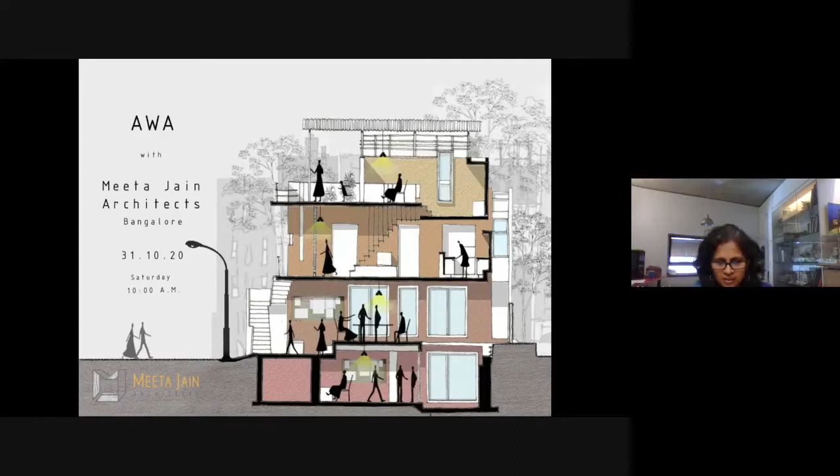Some of the driving questions for us in practice have been about how inclusive the spaces can be, more than the materialistic or stylistic aspects. At the heart of it is how can whatever we design or organize allow people to meet more than they are intended to, more than deliberately required. How can we increase chance encounters within the organization and also between the building and the outside world? The idea of architecture as a vessel of energy exchange between humans continues to fascinate us. This quote by Khalil Gibran, 'Let your home be a mast and not an anchor,' expresses the spirit of what this home aspires to be.

I feel a lot of deep gratitude to have had this opportunity to design a home which life presented to me, almost like a dream space, where one's spirit has not felt anchored or held, but it's been an amazing space of exploration, open to family, friends, extended family, guests, and where I've met the most amazing people. So in that sense, it's really worked as a mast.

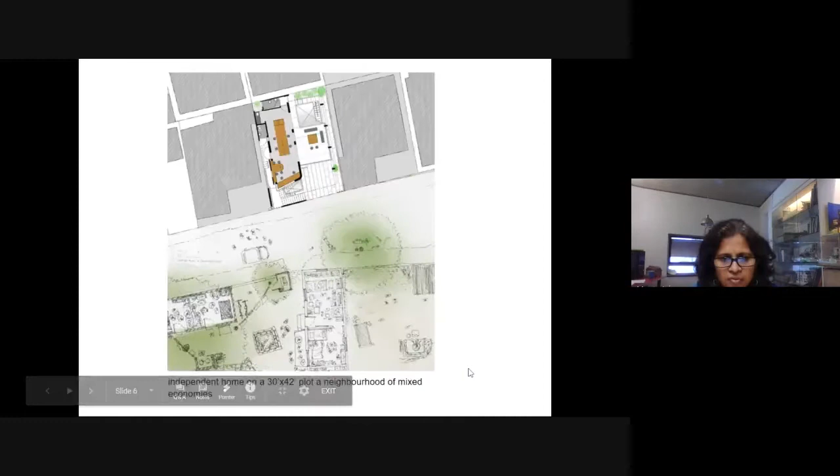The facade is modulating in nature, like the front facade by the use of louvers. And then, of course, the finished versus unfinished in terms of interior surfaces is also at play.

Now, coming to the neighborhood, right opposite the site there is a little community of vendors, which is actually a disputed property, so the owner has let it out to a vendor community. I really call it a neighborhood of mixed economies - a middle class or low middle class presence, which actually makes it a very interesting site in many ways in the urban context.

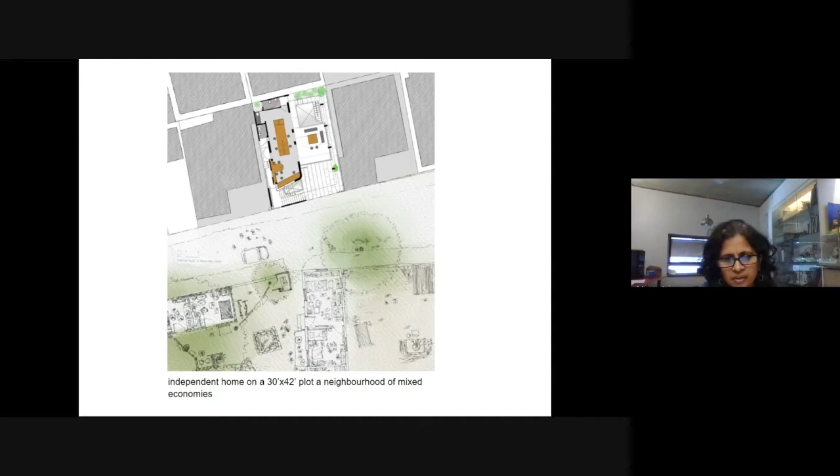These beautiful drawings were done by two interns, Kamal and Vikas from CEPT, who were here last year. As the picture shows, there is also this aspiration to engage with the children of the neighborhood, whose gate is right opposite ours, over some events. So this is a little Ganesha which was made with these children.

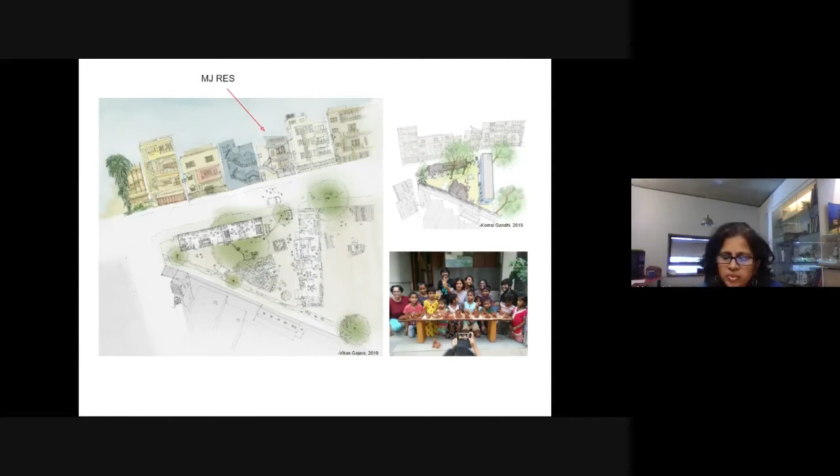The gates were open, so we used the front yard, and a lot of these children are Muslim children, and it was just interesting to see how there are absolutely no boundaries when interacting with children. So you will also see me constantly talking about the use and imagination of spaces along with architecture, because that forms an integral part of our work.

The other thing that consciously dominated the crafting of this building was how ungated and open the facade could feel in a neighborhood which is gated. As you can see, the buildings on the left and right with their obsession with grills and more grills, and security concerns dominate.

Whereas in this building, we chose actually not to have any grill in the front, because my view is that the thief never comes from the front. But at the upper levels, we do have grills where there are possible places to hide.

So essentially, at the form level, it's a pavilion and a box, a duality. And the same duality is expressed across all levels, as you can see. There's a basement, which is the largest space, where you can see these two columns.

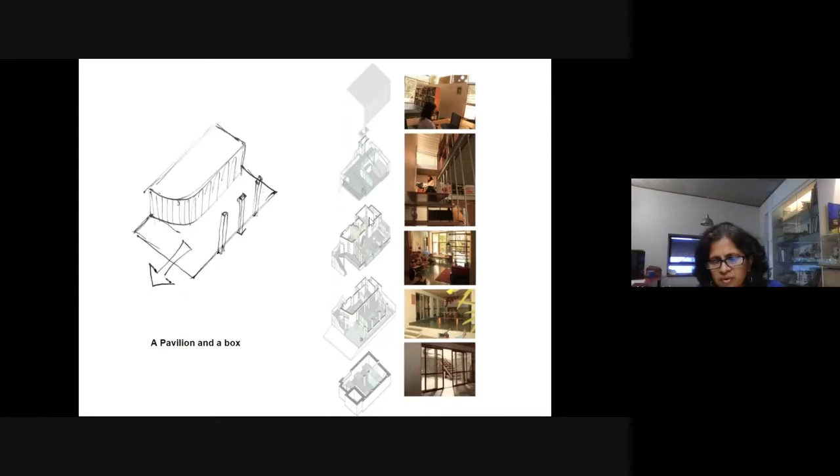Then at the ground level plane, it is completely open, and the box is towards the left side. The same thing continues at the first floor level, and at the second floor level it reverses. The pavilion stands out in the terrace, so the box becomes a void there.

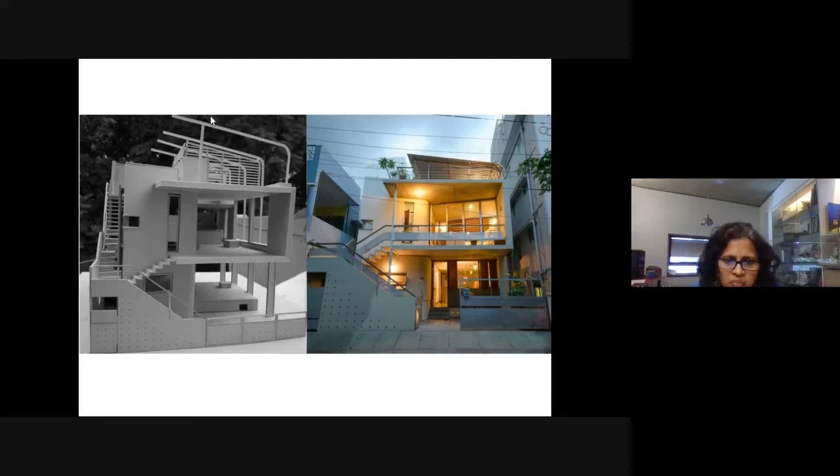And as the model shows, the sheet roof, which is actually the secondary layer of the pavilion, comes from the top, takes a bend, and rises and falls in the living room space. This has been removed to show the pavilion-like nature of the model, and then just the columns continue down.

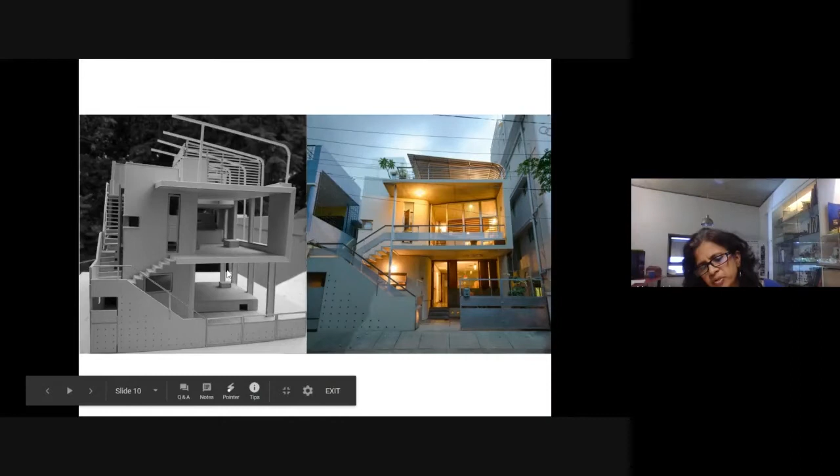This left side picture shows how the building was originally present. At the ground floor level, there was an open volume right from the beginning to the end of the site. Later on, this open space got built and it's present day the office where we work out from.

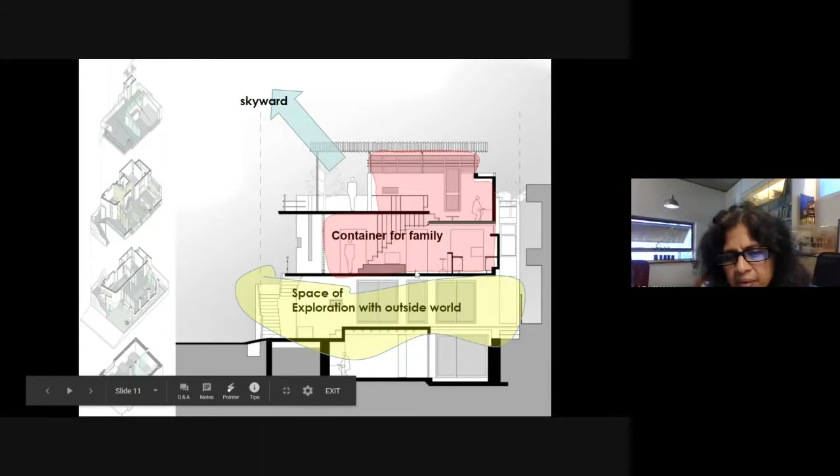This section explains the same thing. The bottom two floors are for exploration, and the upper floors are a container for the family, and there is a dominant skyward connect. Having said that, I think the great shuffling of spaces happens because I have the privilege of working - privilege and also a constraint of working.

I've been a single parent, managing family, and just multitasking. Earlier, my parents were here, both of them were here, and they passed on. So this really allows me to attend to everything very efficiently.

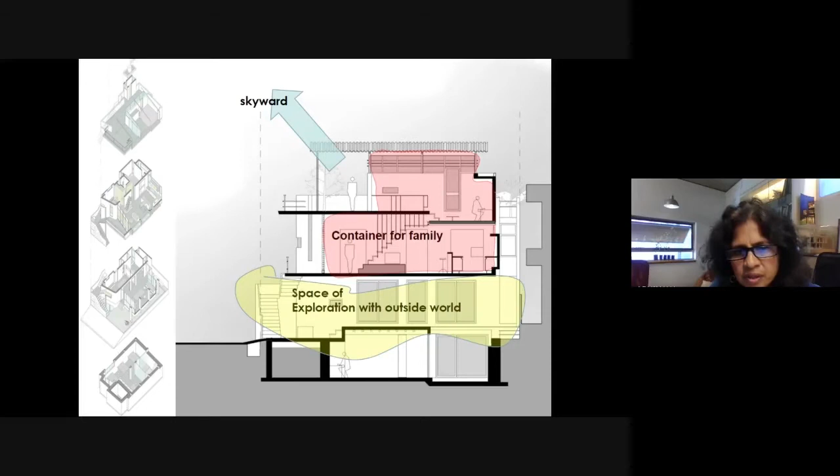So these are the plans, and I want to highlight one thing to you. As you can see, it's a very simple plan, perhaps the simplest of all my projects. This ground floor is completely open, and only the box—the box is also kind of softened with the...

The site was not a perfect rectangle, and that oblique shape allowed for the staircase to fit in, and also gave rise to this angular wall, which at the upper level invites the user in. I also want to point out that the setbacks have been used cleverly, in the sense of extensions with metals.

The top left corner was allowed by the bylaws to get occupied, so we've put in toilets, staircases, and these little balconies there. Even the living room projects out into the setback space, which allows for using a temporary material. So I said, since I'm using a temporary material, a little bit of fudging with the bylaws is okay.

As you see, the house totally orients to the east—there is no view to the side at all. At the back, there are some openings through the kitchen. So the living and kitchen bay is one space, and then there are two rooms here with a toilet in between. The third room is accessed through the staircase, and then there's a whole terrace to be used.

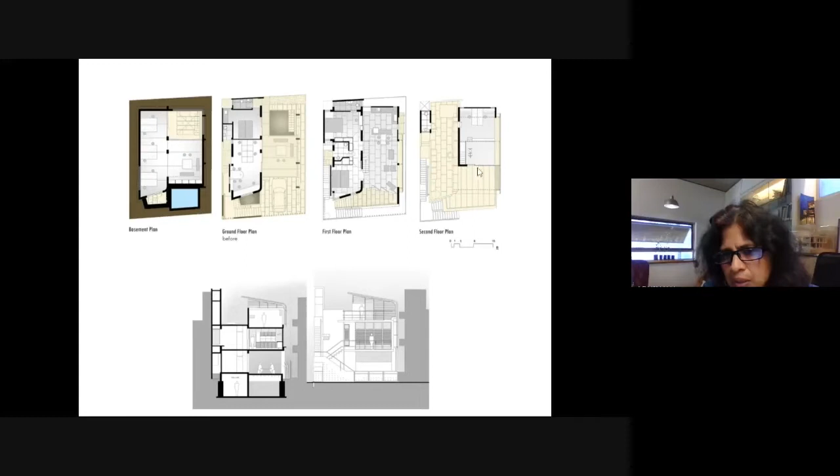So I began by putting the office here, which wasn't the original plan, so that I could just live between the first floor and second floor and not need to go down and spread myself out. So the initial office was on the upper floor.

As you can see, this picture actually shows when the office had moved down, but further I'll show you how it was earlier.

The compound wall becomes a very important element in most of our designs, where just by raising the wall and including the landing, a lot of—like below this wall, there's UPS and a lot of service areas at the same time. So it's about how one can use each and every element effectively and tuck in things without wasting space.

And so, opaque and openness again—also finding to what degree one can engage with the kids opposite, because once the gates are open, they just want to run in, and you want to engage, but at the same time, how do you draw balance? So sometimes we do engage them with these kinds of activities.

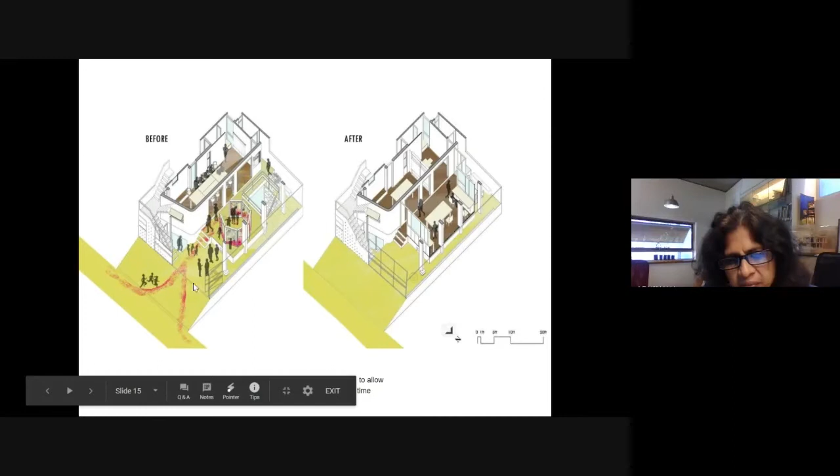I want to show you how the space changed. Earlier, the street came in, and we had used these spaces for exhibitions and many different activities. And then from there, you could go down and access the basement through a courtyard. Subsequently, the space got enclosed and became the present office where we are sitting right now.

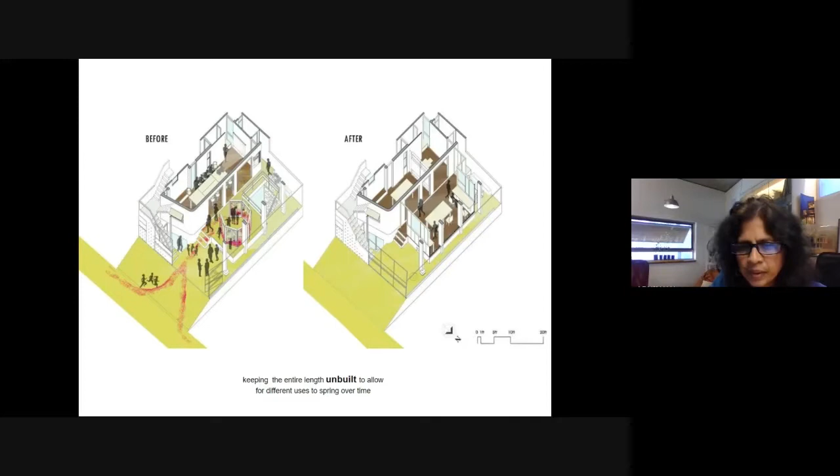The office space also expanded. So this is earlier, in 2009, when we built the house.

We had also run a shared co-working space called Protospace with another artist named Prayas Abhinav, who came up with this idea. So two floors, ground floor and basement, functioned as Protospace. And of course, this kind of a play space—sometimes we had exhibitions here too.

This was a very interesting exhibition we had, imagining a temporary space for Bangalore, designed as a temporary exhibition. It's like a pop-up exhibition with these playful pivoting panels scaled to the height of a child, so that's another way of making the places inclusive.

So how can children be part of these kinds of exhibition spaces? As you can see in these two images, the space has changed from being open to enclosed, but somewhere the character of being a pavilion is retained by the way this enclosure is built. On top, you can see the railing going towards the basement courtyard, and here you see the present design studio.

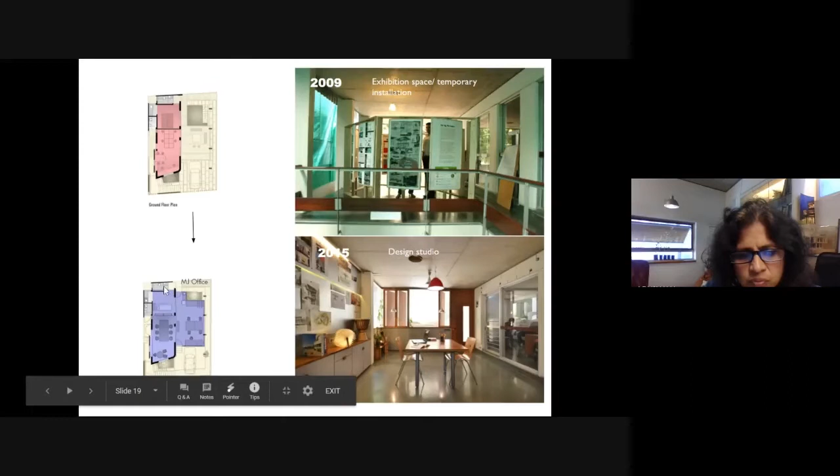Since I'm always aware that life is changing, in case one has to shift the office out, it should be possible. So this space was made in a way that tomorrow it can become a two-bedroom house - two toilets, two rooms, living and kitchen. The counter is already integrated at the back. So that's possible for the whole house, that it can be either a house or entirely an office, without the character dictating it to be a certain way. There's that openness available.

I also want to share that this particular walling system was made with lightweight material. It's a dry enclosure system, meaning no masonry or wet cement work was used, and it was popped up very quickly. This was also a demonstration and an early experiment for me to engage with the fact that if we were to build houses, which is very much possible in Bangalore, how could one do that using just metal, bison board, cement boards, and wood in this case.

Within the meeting room, we also have light movable partitions - this partition has shifted places three to four times, made of recycled pine wood. The side two doors swivel open, so you still maintain the continuity of the volume by opening that. Beyond this is a private guest space, and people can use it for sleeping. But this is part of the office.

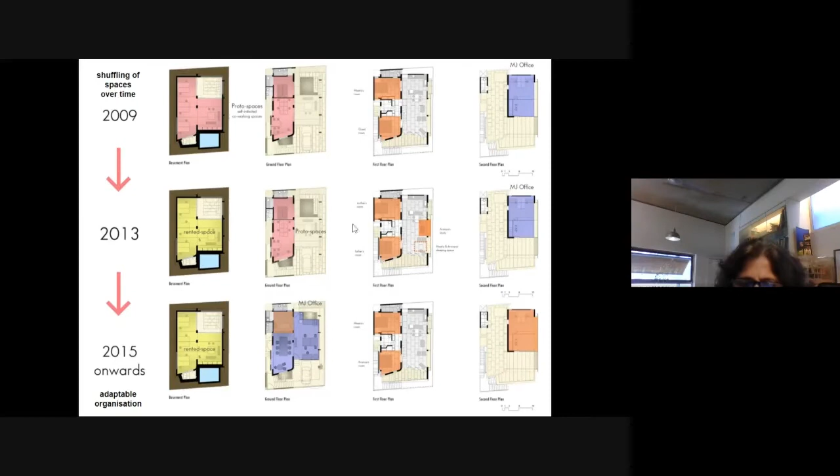So it was very interesting how the spaces have seen that multiple use, and like each and every space, I cannot feel that any space is specific in my house.

Then eventually in 2015, my mom passed away, and before that, luckily she got to see this office space below, we had just created this. Now we have more space, we have three bedrooms, and of course the upper space is double-leveled, and it gets used in so many ways.

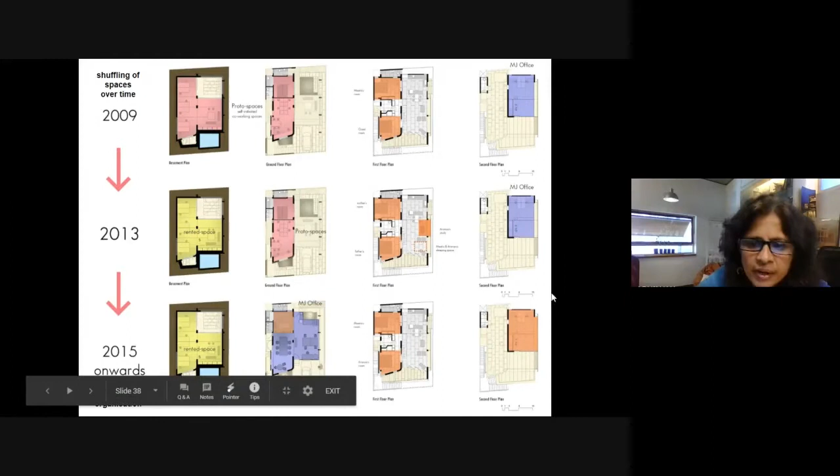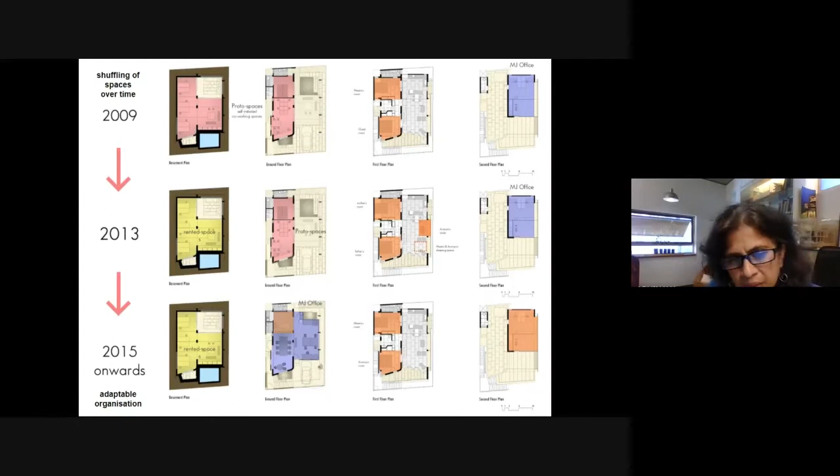So there's this kind of obsession with having multiple doors, multiple entrances, and tomorrow if I have to invite housemates to live in this house, how each one can have their own private space would be very much possible. Or tomorrow, if I move out and this whole building needs to be converted into an office, it should still be possible.

So that's the house, and there's always the desire to continuously engage with the street.

This is the time of Diwali, where we had a slideshow, and the screen could be visible from both sides. The projector was kept inside the office, and that's my dad. He was still around, and we had this little slideshow and Diwali party.

It was fun, and just pointing out the fact that the kind of spaces also allow for different things to happen, there's a paper strata workshop organized by the interns in the basement, when it was unoccupied.

This was one of our new initiatives to just have joy of handwork, so that people come together and work with their hands without their phones, but create different artworks bounded by one technique. So we had diary stitching, and this is completely intern-driven program.

And these are some images from last year. We had worked on a project of making a Bangalore map, and that's Komal, Vikas, and Vasant. This is inside the living room.

And for the first time, I'm very fond of Garba, and we managed to organize it with help of Vikas and Komal, and they were the lead dancers in the Garba, and we had a neighborhood Garba in Bangalore, so it was very special.

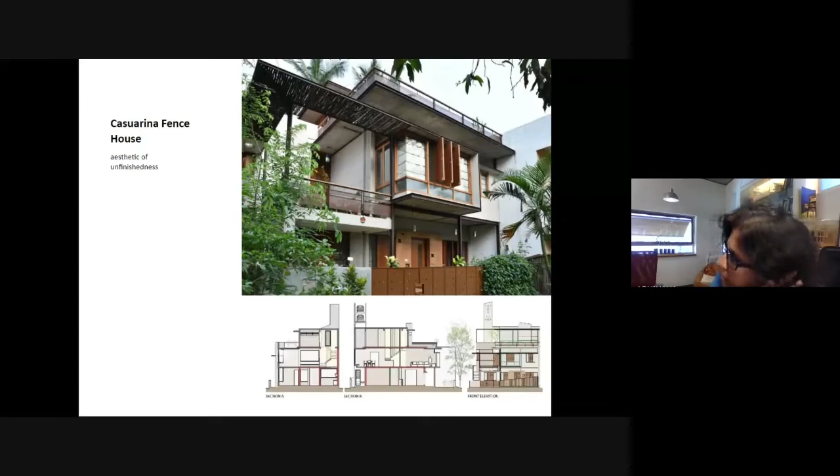I think from this project onwards, a little bit of earthiness started entering my work, where the color or use of mud, actual mud or the color of mud, and metal started being more rustic, more plain and not painted, unlike my own place. So there's been a natural shift in terms of palette. Clients often want something not as bare or as too simple as my home might be for them, so this was our way of including different materials and yet staying true to the idea.

This was a renovation project, and the upper part is a house built on the extension, hovering again over the garden below in a way that it's maintained. Even if you're building more, you don't express it, you stay light and don't make it heavy. That's the idea.

This is a house we finished last year. It's a corner house, and as you can see, some elements continue, like the compound wall being part of the form, the perforated screens, but now they've taken a natural color, along with the dominant presence of mud. The entire ceiling is expressed, and suddenly there's a sense of color, but it's not a color, it's actually the material, which is the mud. So there's been a desire to embrace earthiness.

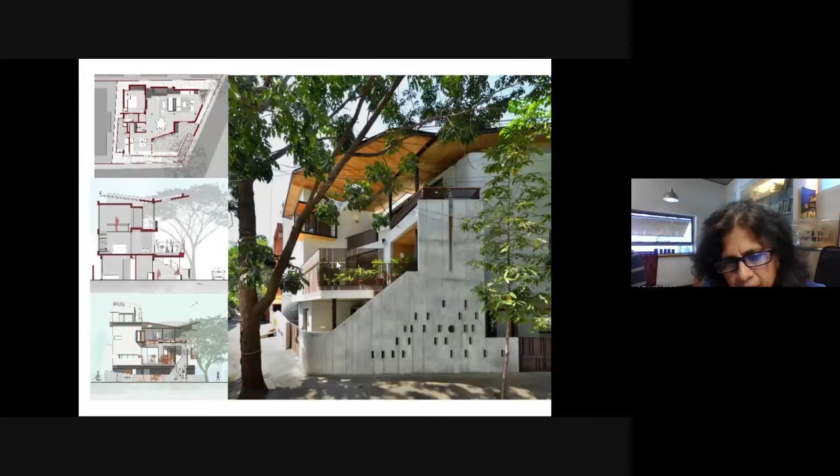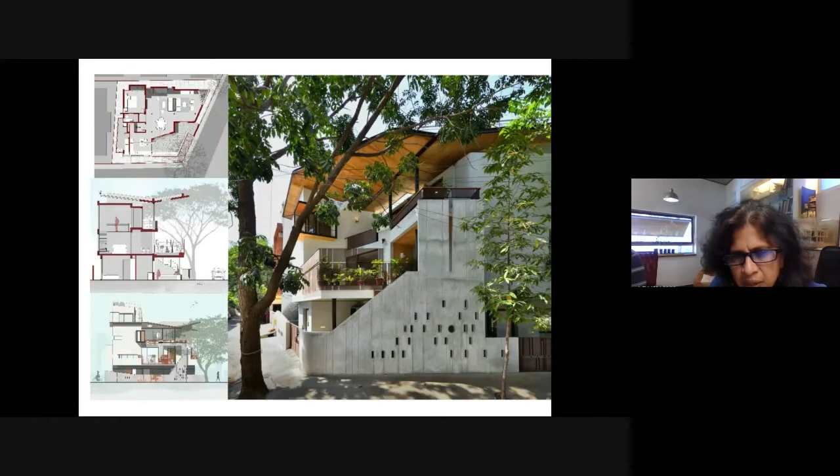This is a four-bedroom house, and it was a simple family who probably did not expect it would turn out like this. They were quite overwhelmed and excited to have a space with this kind of cascading form, part of the street and yet private. It's a joy to go there and see how thoroughly they use every nook and corner. This window here, we used to call it a Juliet window, where you can step out and sit, like a window balcony. Some of these elements, even the circular skylight, continue to animate most of our projects.

Some of the interior images, again showing the inclusion of outdoors into the indoors.

This is a house we also finished early this year, and luckily for Shabnam Virmani, who's a filmmaker and a Sufi singer. The drawings are unfortunately not clear, but this is again a very different house. Her brief was that the house should not look contemporary in any way, and with her constant engagement, I feel I really co-created this house along with her.

But at the same time, not losing the essence, some of the principle of rising upward movement is expressed into the living space. This is the only house where the skylight is literally the center of the house. The client was quite excited to discover that her house had 9 doors, and the 10th is the skylight — similar to how the human body has 9 doors, and the 10th is on top of the head, which is the spiritual center. So in her own way, she made that connection. It was very interesting to work on this house with a very passionately involved client.

As you can see, the surfaces inside turn very unfinished and rustic. A lot of mud and grays are coming in, moving away from the very contemporary. I must say I myself discovered a lot of new ways of treating surfaces in this project, which earlier I hadn't explored. So I'm happy about that.

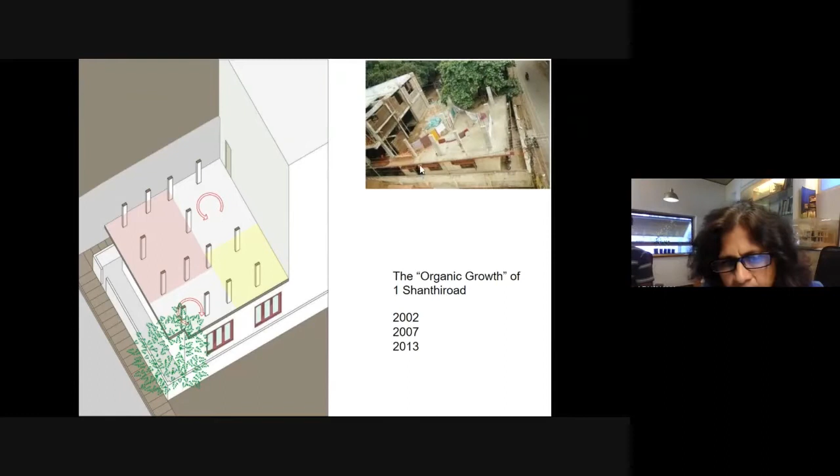The courtyards automatically happened because there was a huge badam tree, as you can see in the picture here, and a grid of columns. This was the condition of the site when we were invited to work on the project, and the grid of columns automatically put certain things in place. The studio and the home are again very small homes, and the idea is how do we maximize the experience within the smallness of it. That's how it kind of happened.

These are lovely drawings made by interns over the years. Then in 2007, when I had built this, Suresh comes back. Suresh is a person who's very open and inviting — his doors are never closed. When you go to his home, there is food always present for anybody who walks in, whether you know him or not. He couldn't contain the effects of his own nature, and people started moving in, so he said, okay, let me make 2 artist residencies. That's when we had to add more rooms, even though one hadn't planned it earlier.

Then the challenge was how to maintain the aspect of the courtyard at the back there, so this became a hovering room over the courtyard. Then he said, I need one more room because I have no space, and this little den space was added on top.

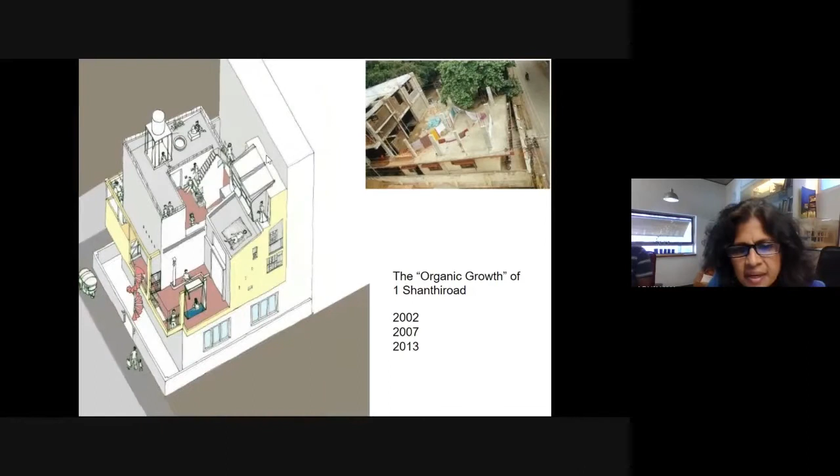What's interesting is that just like this picture shows, it's not an exaggeration — this is how the space is actually used. If you go there on a weekend when there's an activity happening, there are people all over the place. It's really organic and labyrinthine in that way. So this is the original home, and this is how the life of 1 Shanthiroad is.

As you can see in this picture, this second courtyard started getting used once it was shaded. So it's always a humbling learning that in a tropical climate, if we really want spaces to be used, we have to shade them, we have to find ways of shading them. This is where everybody comes and gathers — it's messy, it's chaotic, but it's full of life. That's Suresh here in the picture to the right down. And the fact that a spiral staircase is the entrance to the main house.

Suresh is an amazingly open client. He just said, I want an open house and a connection to nature, and that's it. There was absolutely no interference from his end, and it was really fun and special.

In terms of languages, there are different materiality and languages, as you can see. The original house is more earthy with oxides, and then I felt it's too ornate. In 2007, I purposely made it more austere and contemporary. Then in 2013, we added 3-4 elements, including this staircase, which is partly plinth and part spiral lightweight metal. All these plinths also get used for sitting when lectures are going on.

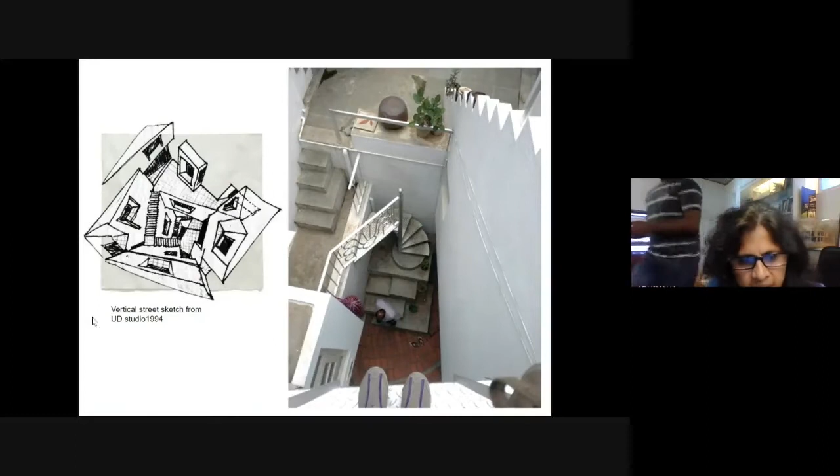I just included the sketch on the left side, which I had made in the Urban Design Studio that Professor Chaya was taking. I don't know why, but they liked the sketch and said, okay, now the concept is vertical streets. I realized I just done it very casually, but when I stood here on 1 Shanthiroad, this is exactly what happened - I was reminded of that sketch.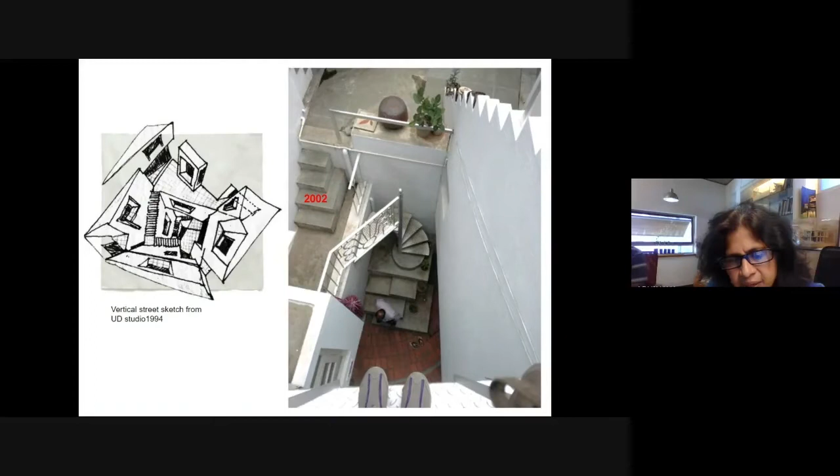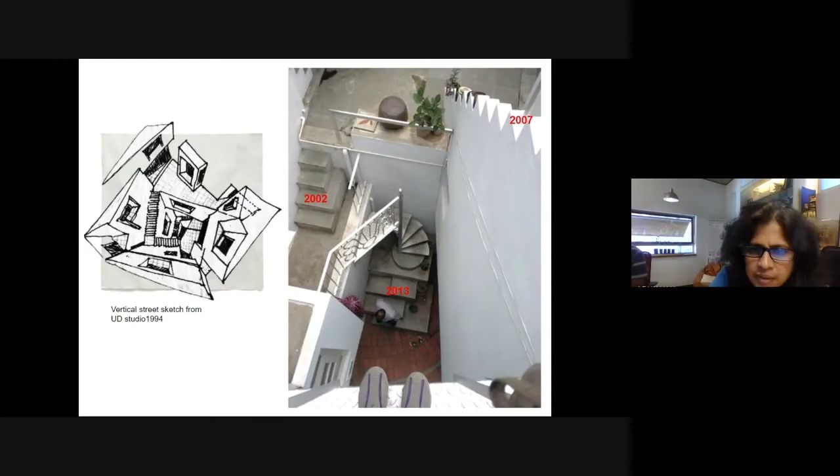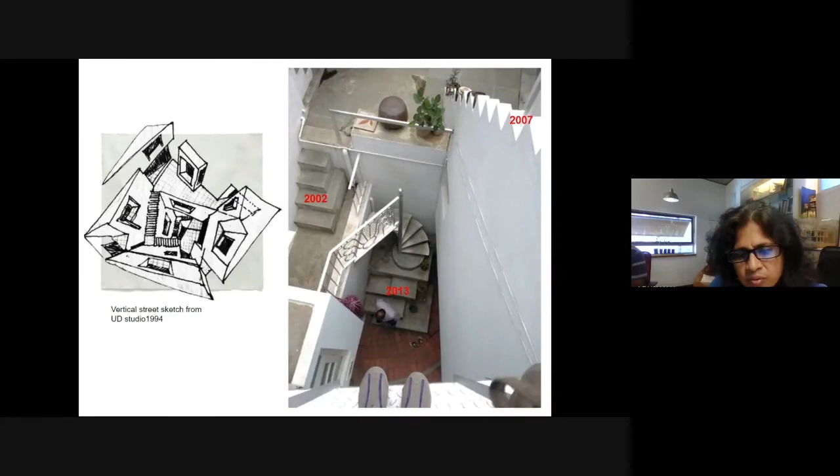The interesting thing is there are 3 staircases in this slide, but they all happened across different time periods. This kind of labyrinthine nature and intertwining does not happen when a designer designs in one go - at least that's what I've come to realize. It's been a very interesting realization, how something which grows and evolves with time adds its own sort of beauty. One Shanti Road continues to be this pulsating home, with much to learn from that space.

This is the last slide. I've put a few words together in the sense of how one is always wanting to play with the dualities - simple and multiplicit, street and the sky, frugality of means, which is very important because when we build in India, we have to use material very sensitively and very cost effectively. At the same time, how do you put calculated extravagance - a term Professor Varkey had first used - where you calculate where you want to show. For example, in my house, the facade louvers are calculated because it was expensive to make that kind of thing, but then everything else is frugal.

Functional and poetic, ascending, descending, all of it is fine, but held together by geometry. Geometry is the binding thing - none of these things should be seen separate. Ultimately, it's geometry which holds it. Geometry itself is also not seen, but the sense of people coming together is what one desires for. So, that is the end of the presentation.

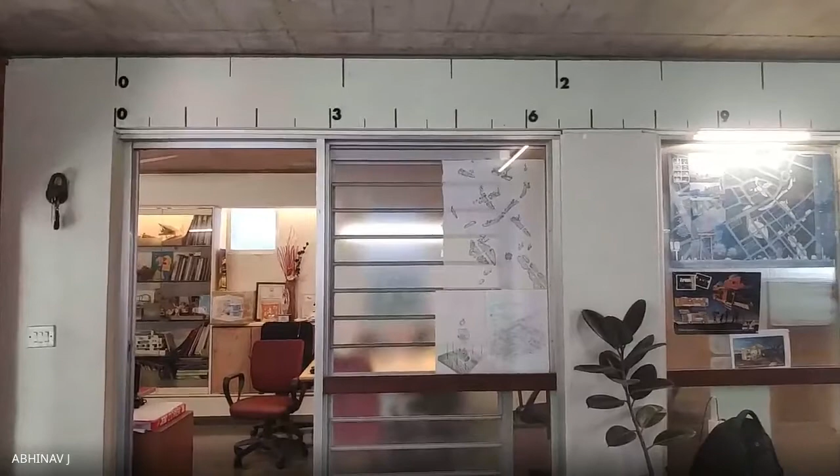That scale is made by Viral Mehta. Viral, I know she's listening, so that was a lovely gift to the office, because scale is always a challenge nowadays, since all the students work on computers and you're zooming in and out of your designs, the scale goes for a toss. So again, this comes from the studio, that you must have a scale.

Visually when you look, you should be able to tell what the dimension is without using the tape. All right, so like I said, this whole space is designed to overnight convert into a 2-bedroom house. So this becomes the living room, and this would become the kitchenette.

I'm taking you to the back door. This is the guest space here. We had a musical evening once long ago, and there's a remains of that on the wall.

Again, I was telling you, this partition keeps moving. Very lightweight, made of recycled pine wood and polycarbonate sheet. And the enclosure is mostly maximum glass and very less opaqueness, as you can see. So still very pavilion-like, because this is not a large space.

Want to open that? My clients sometimes say that your bathrooms are always so tiny. This is the common bathroom, and yellow oxide—again, the idea is to have very muted surfaces, not too many joints. So this side is rough stone, granite, and this side is yellow cement oxide. Again, not seeing too many joints and too much fussiness.

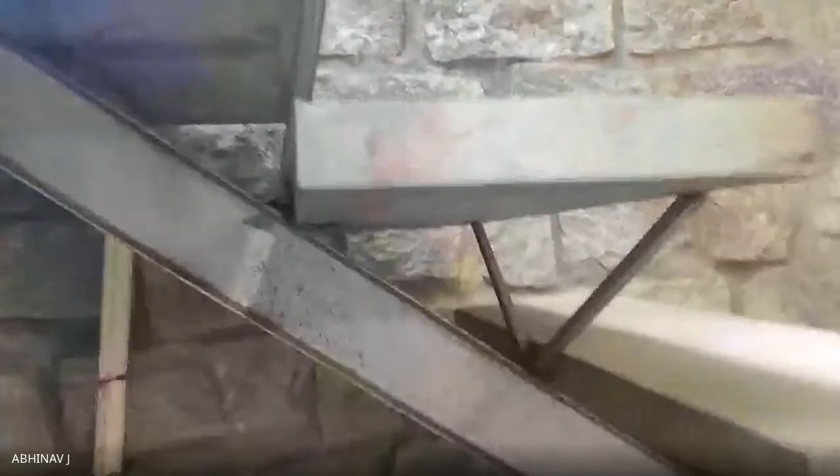Cement staircase, again, cement cast on T-angle frame and supported by a channel section here, as you can see, and each tread is held by this sort of a V connector. So this basement, I must tell you, is only done as size stone masonry, which means we didn't do any RCC foundation.

And I took a chance because it does leak sometimes when there's excessive rain, but as you can see, there is a groove all around the basement, and that takes care to some extent. And now I also had a well dug in, so in case there is excessive rain, there is an arrangement for water to be pumped out.

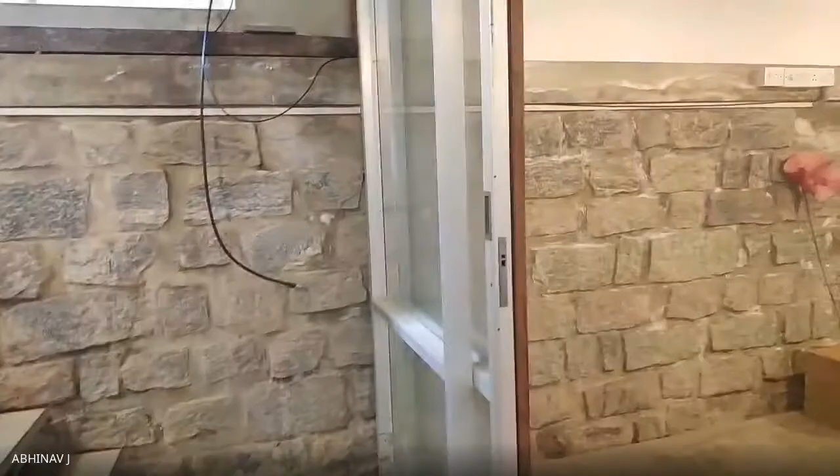But doing an RCC basement would be more secure, but it was outside my budget, so I took the chance. At the same time, it's lovely to see this size stone granite masonry wall.

So, hello ma'am, that's the eastern entrance of the basement. Again, the basement can be subdivided and used by two people, from the back and from the front. Hello, ma'am.

So coming up from the basement here, this is my cat's favorite place. Sometimes they pee there in that pot.

Okay, going up now. Anything, Abhinav, here? So again, as you can see, the two staircases—the one going on top is transparent. I mean, it's interesting to see people's feet, people climbing up.

Perforated sheet is a very favorite material of mine. It's also an inexpensive way to make surfaces.

Now at this junction you have to make a decision whether you want to go up to the second floor or you want to go to the first floor. My urban design friend Himadri Das calls it the urban node.

So the idea of opening should not fixate the space, that's what I would say. It should address functionality, issues of privacy, and at the same time, it should ultimately be very simple.

In this case, I have used different kinds of openings, but most of them, as you see, are part opaque, part glass. What I don't like is to have openings where you have security grills and then curtains, two layers of curtains. I just feel it becomes an overkill personally.

But then I have tried to resolve that for my clients in ways where the lightness can still remain. Now, one of the main factors for openings would be climate.

Openings need to be shaded depending on how sharp your sun is. Ma'am, I guess we have lost your video. Yeah, now it's visible.

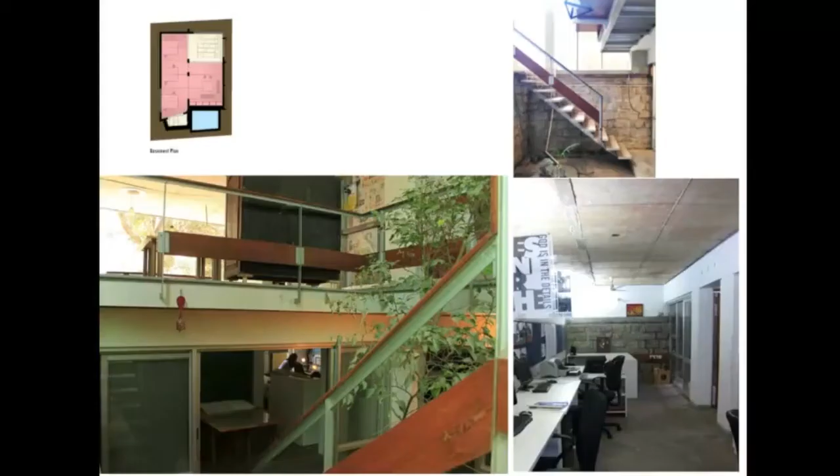One of the staircases to the basement, the one you mentioned about being cast in concrete, were those precast panels supported on the C channel, or were they cast on site somehow?

The one in the basement, actually all the staircases here are different, so I sent the interns to do a measured drawing. The one in the basement is a T angle frame, 35 by 35 by 5. It has a mesh placed in between, and the whole thing is cast like a precast.

So it's a precast tread, which is then welded onto an I-section and supported by two angular flats, which support the front ends of the staircase. At the back, the stringer holds it in the center, and at the front there are two thin, I think 12mm rods holding the front.

One question about this space right here by Sunaina is, doesn't the sheet of the roof make a lot of noise when it rains?

Good question. Yeah, maybe we can walk a bit. Now see this profile of the sheet here. This side is south, so what happens here is an experiment I did, which you wouldn't ever normally do.

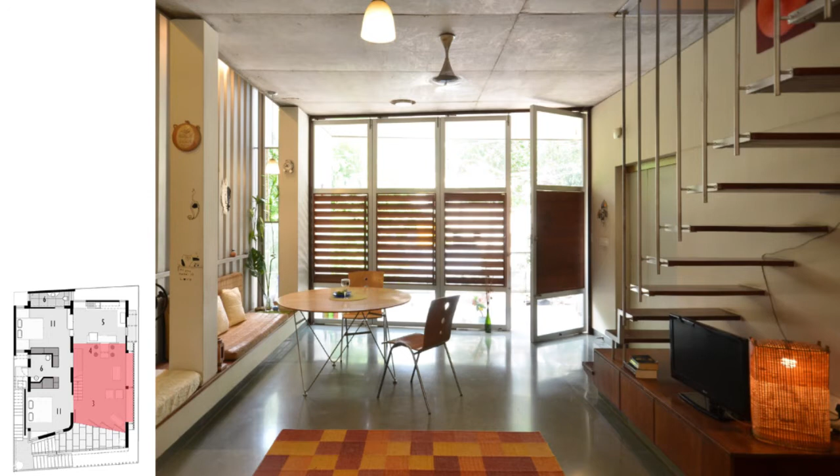I'll explain that to you. See here, this is a hinge door. So what happens is when you're looking from inside, there is never a separation. You see a hinge, and a hinge, and a... But whereas in the pivot, you see a clean line. As you can see in the studio doors, they stand like walls, and I feel that aids the character of the space better. That clear gap - this is a pivoted door.

It's much neater and cleaner. But you have to be careful using pivoted doors, especially when you have to address sealed conditions of climate, when there's a lot of rainfall and there are insects, if you're building in a forest, because there's always a gap left with a pivoted door at the base. But wherever I can use it, I prefer to use pivoted.

Does that answer it?

Yeah, I think so. We have one question earlier by Sunayana. She had asked if I could explain how the mud roof was cast in the Mule Mane - Mule means corner, Mane means house, so corner house. Yeah, it is actually not made in mud - it's only surface treatment of mud. So instead of doing the regular plaster, we've done mud plaster.

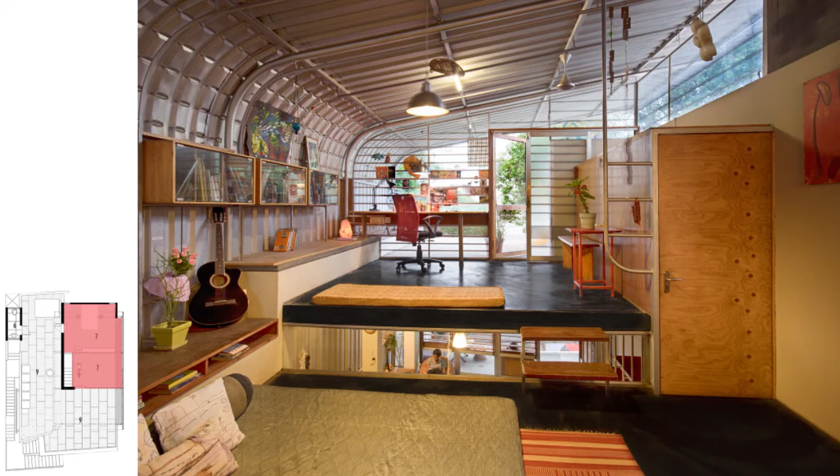Is that black colored flooring an IPS flooring in the bedroom space? Yes, yes, yes. Does it have expansion joints? No, this one doesn't - it's a small area. The upper part is just 2.4 meters by 2.4 meters, and here it's about 4.5 meters. No, not here, but yes, you should ideally have it. There are some minor cracks actually, but we don't mind them - it's a cost effective way of doing it.

As you can see, there are remnants of the old office. The table is still there - those two tables which we haven't removed. And when our guests come, it's very useful for them to put out their luggage and open up their bags.

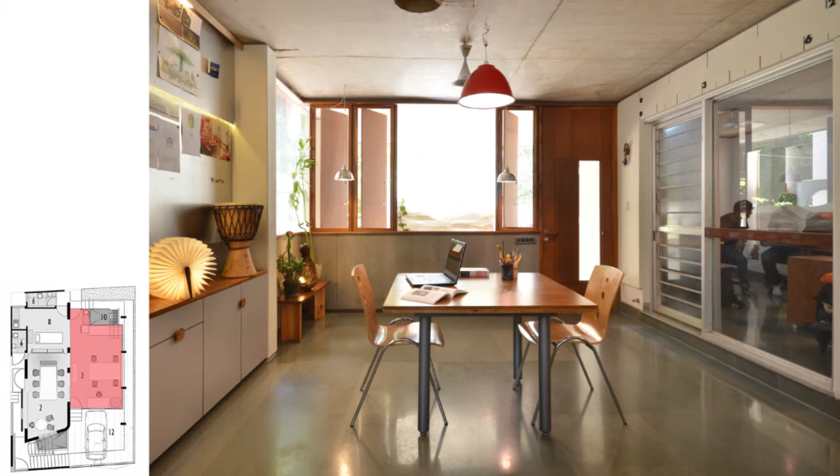One question I had was, you're using a lot of, not temporary, but dry construction techniques. So doesn't that over time face any issues due to expansion contraction of metals and two different materials combining at one place and reacting differently to climate?

Yeah, so actually the dry work - more or less the materials are similar. So you would use boards and metal and wood. So when you put wood with masonry is when you have to worry a lot more, because it would add cracks to the masonry. For example, if I have to make a wooden jamb, I'll show you here. Now this is an aluminum door - aluminum has no expansion. But if I was to make this with wood, I would have to address it by giving a groove in the plaster for the wood. So with dry materials, they are more compatible in terms of temperature. Also, I think your question would come more into play in very extreme climates, and I'm sure there is engineering available where the nuts and bolts are allowed to expand, but not in a climate like this.

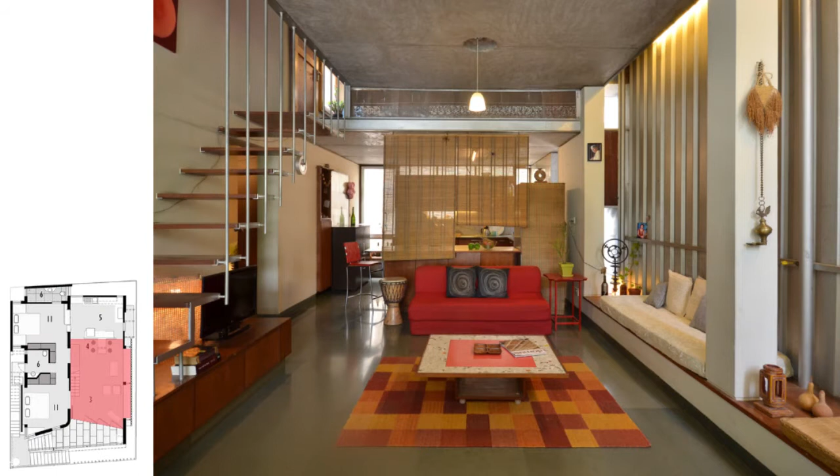I was intrigued by the staircases you have used. Usually through your projects, I saw super light staircases, which are like an installation in the project. But what are your views on an opposite staircase, which is very heavy, robust, and massy? I haven't seen that throughout your projects.

No, it's not like that. It depends on when it's in the space. If I want to use the underneath of the staircase for storage, then it's massive. But if I want space around the staircase, then I'll make it very light. So some of the examples you've seen are those, but it's not like I have one preference. If you see in Shabnam's house, the staircase is heavy. It's based on functionality versus what's the space around. But when you make a light staircase with space through underneath, you have to make sure you design the spaces around accordingly.

I mean, I love the staircases of the fort, especially those narrow staircases which went up to the terrace, where you feel squeezed, and then you come up to the terrace. I love that staircase as much as well. So it's not like I have a preference for one or the other, but the idea to push it to minimum, maximum lightness, is just a sense of exaggeration that it's a staircase, it's carrying you, but it's light. That's done where there is drama to be seen. It should be placed where you see it; you wouldn't do that in a place where you're enclosing it in a box.

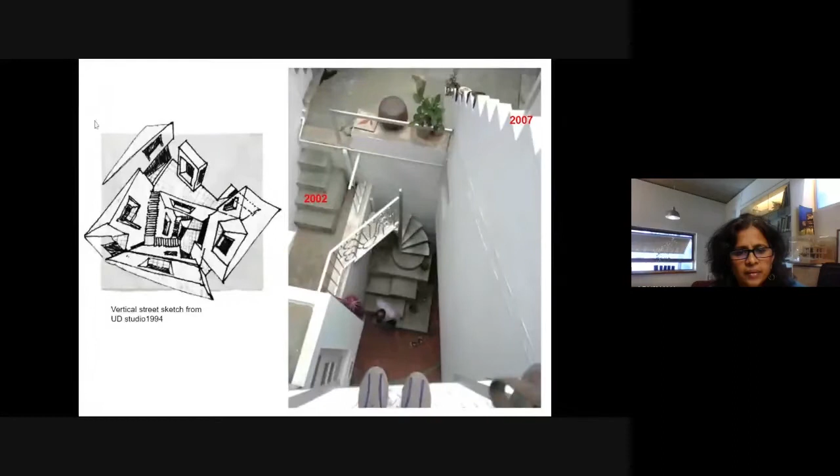But it's placed in a way to maximize use of space. The site was very small, and placing it there means you don't waste area in circulation. Minimize circulation, maximize use, that way. I want to show the plan. Yeah, we can just go to the plan then.

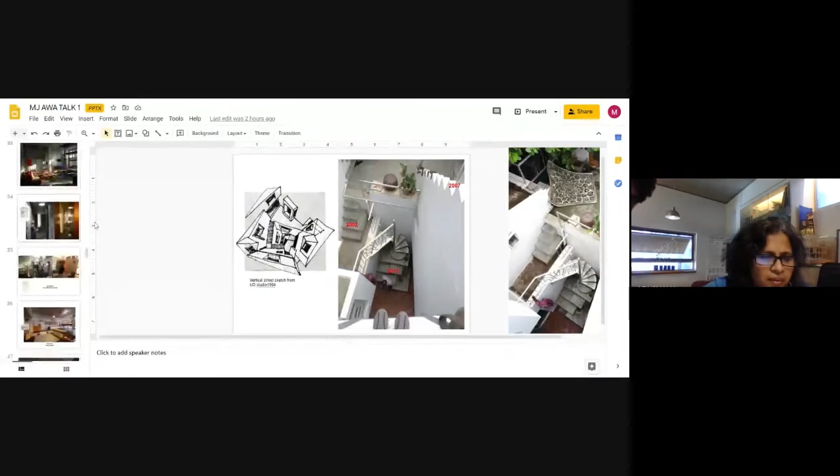You can see the slide. As you can see in this diagram, the stack is still at the edge, and the extension is only a metal sheet, so pipes are still going from here. Pipes are going here and pipes are going in this corner. Since they are not visible to anybody, I haven't bothered to cover them with any duct-like material. At other places where they're visible, I obsessively work it out so that they aren't visible, or they become part of the architecture.

As you can see, there was no space to be wasted. It's a 2-bedroom house with a balcony, leaving all the setbacks. That's why, by the way, I have followed Vastu—though I don't believe in it—but if I have to sell the house tomorrow, it should be possible. So, master bedroom in the southwest, kitchen in the northwest, east-facing entrance. That way also it works.

Ma'am, I had a question. When you were showing one of the other projects you had done, a farmhouse I think, the front facade had a huge cantilever. Was that actually a cantilever or was it just appearing to be?

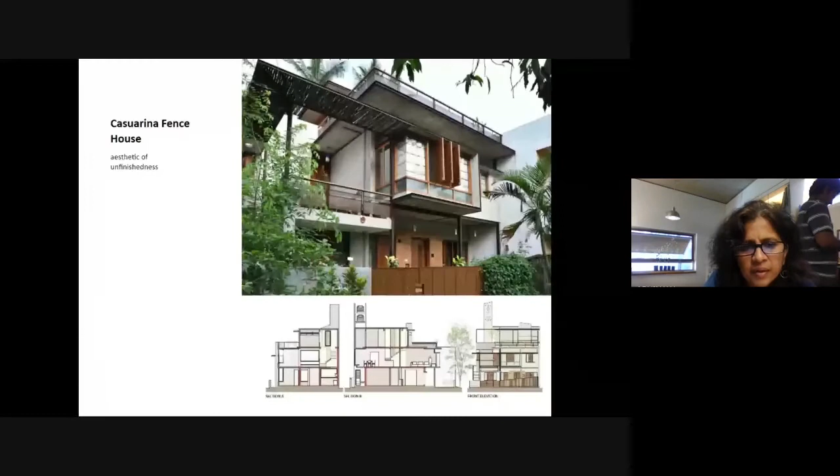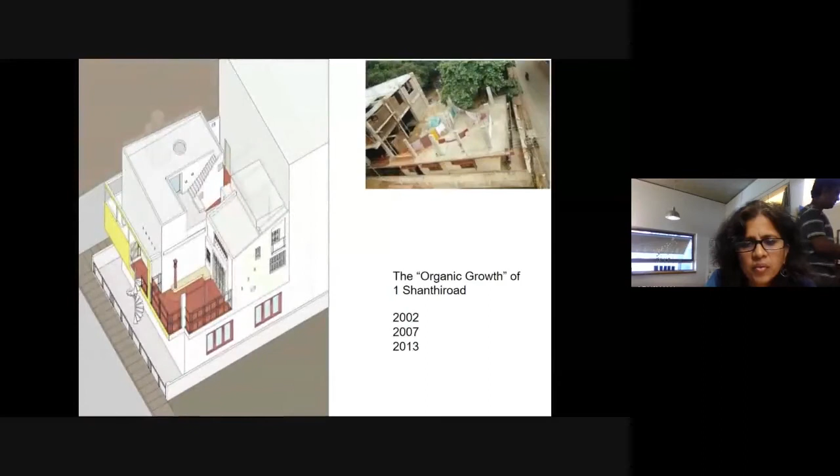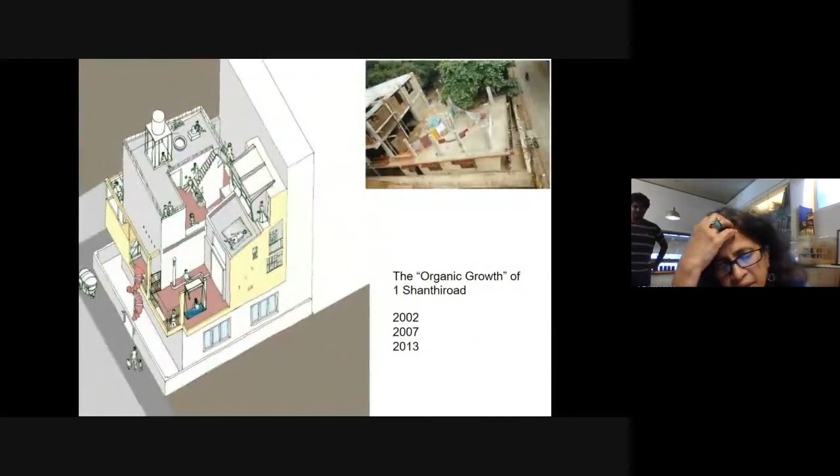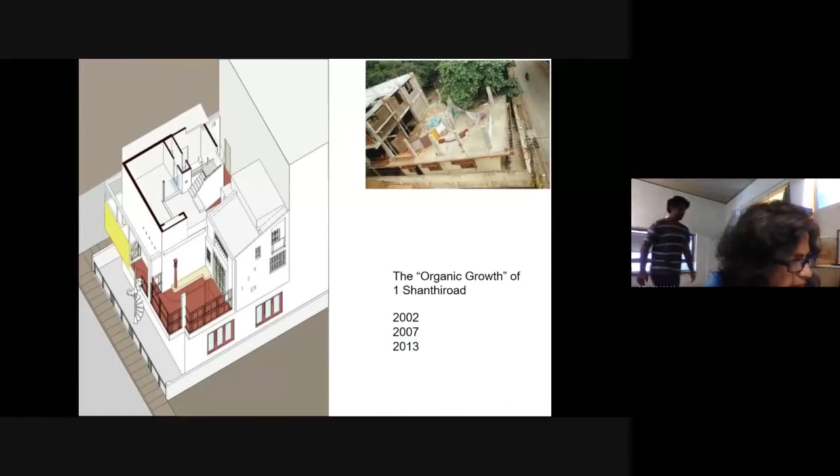When you have this full height kind of door, it makes smaller spaces look bigger, which is of course tried out. Like in my own living room, it's only 9.5 feet, but the perception is that it's about 11 or 12 feet high. So that's the advantage — you can make smaller spaces look bigger.

But it's not like you can't introduce a lintel — please introduce a lintel, it's about doing what you are intending to do. For example, in Shabnam's house, though she said no contemporariness, I still managed to convince her that we must have these large doors opening out to the garden, because she has these satsangs inside and outside, using the landscape. So this part is pretty contemporary in that sense.

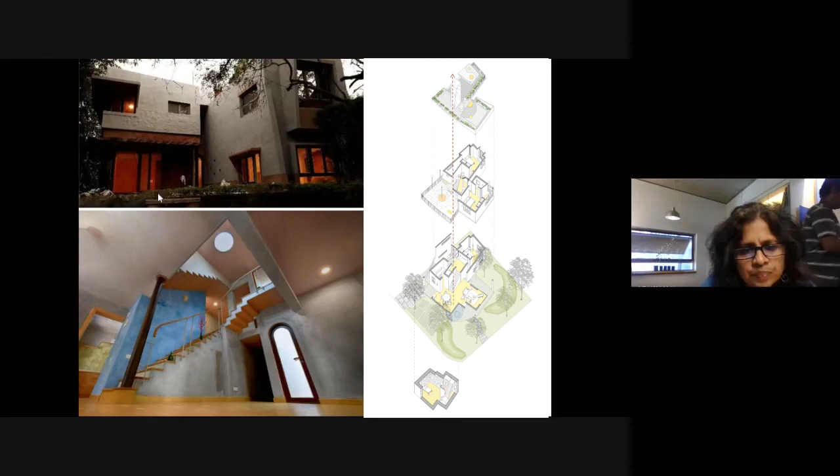Right, yeah. So the heavy showcase is here — somebody was asking — and so is the upper one. So here it's like a scoop into the volume.

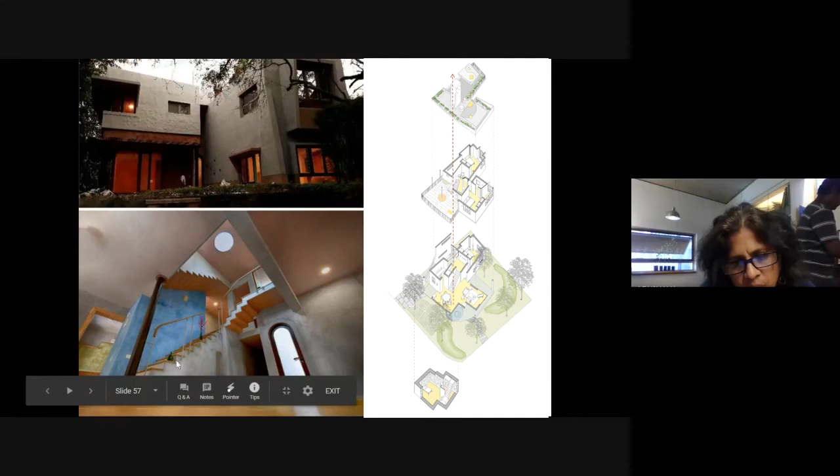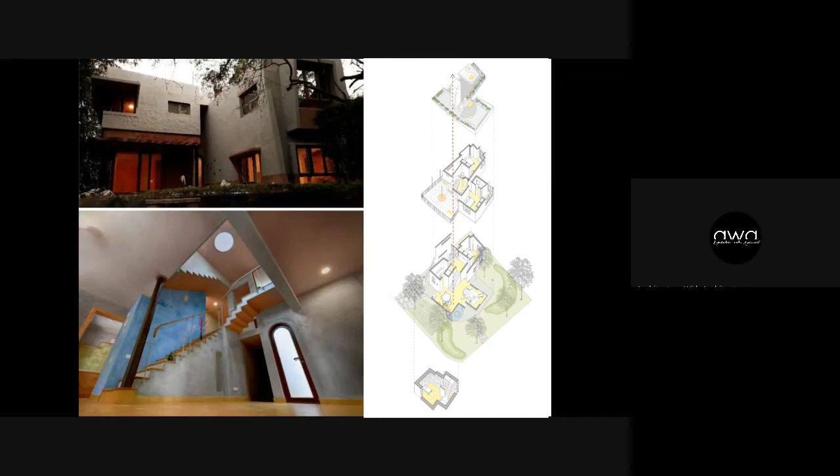Any other questions? I guess we are done with questions. Yeah ma'am, I guess it was quite successful — the walkthrough went quite smooth and it was quite successful. All right, thank you so much.

I had fun revisiting my space with a new sort of lens. It's always interesting — it gives you new ideas about how things could have been or how they can be. So thank you for that.

It is quite interesting to see the use of materials that you have used. Many of us are doing a working drawing studio right now, so we could actually relate the things that you have used and the discussions we have with our faculties.